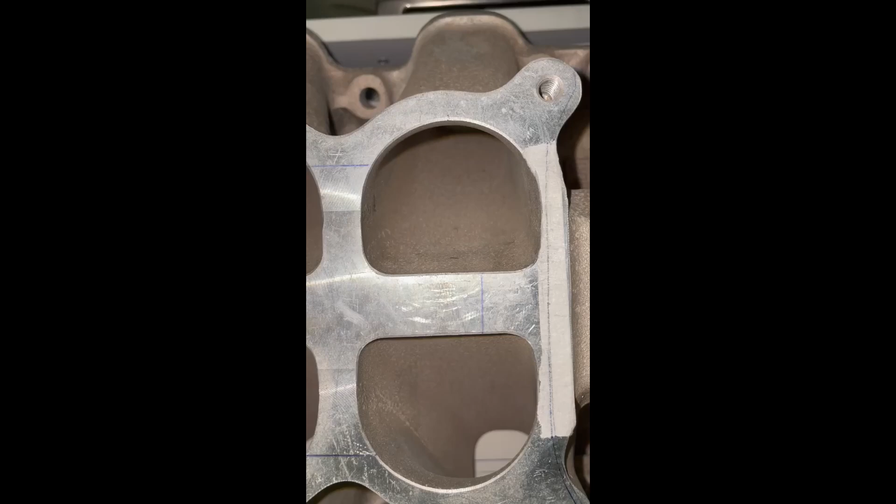Just doing the cross-sectional area of this vintage Weiand Cleveland Tunnel Ram intake. Just want to see the entry point with this D port, the actual volume that it is, compared to a little bit further down where it makes the turn, checking that volume area, and then comparing its opening further down where it mates up to the head face, the intake port on the head end. We'll just see if there's any restriction or choke points with this particular runner.

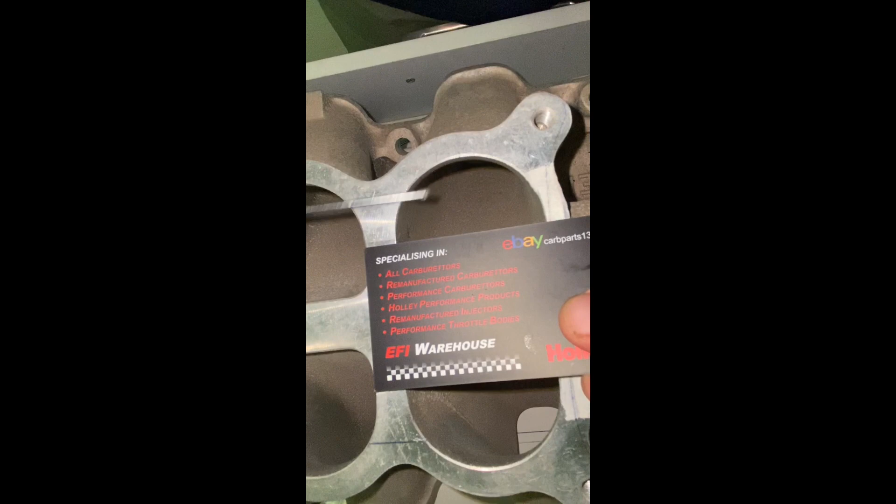So there's a few ways you can measure to get a fairly accurate volume area calculation. I've gone and done this prior to this video, so I can make this video as short as I can. Just bear with me.

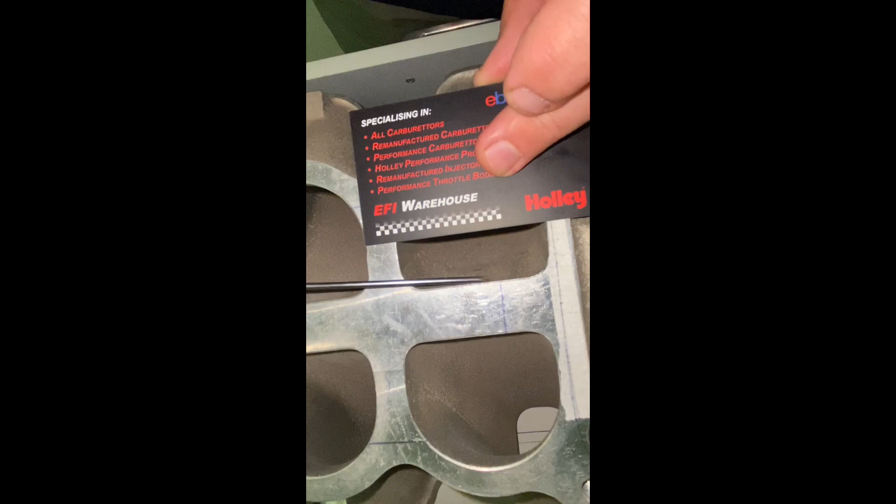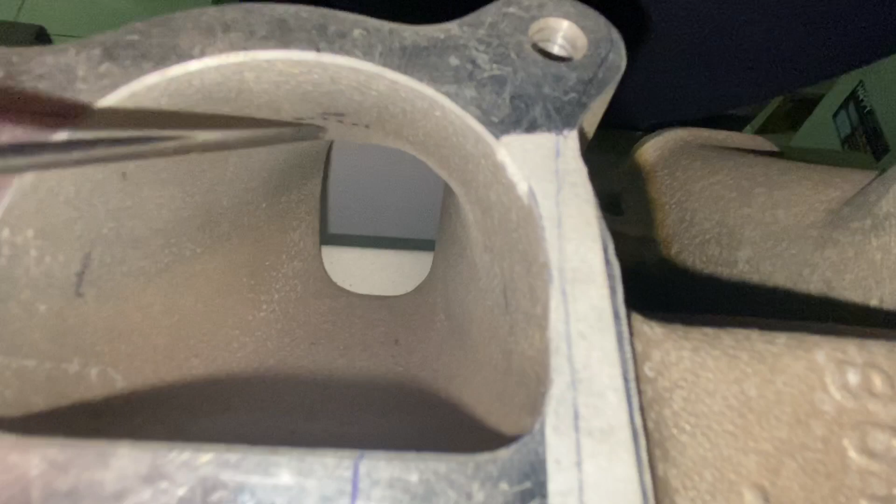You can use inside diameter calipers for all these measuring purposes. You can use all sorts of tools, or make up your own tools if you want - cardboard hard edge things, just so you can scribe your measurements and work them out on the bench. There's a few ways to get an accurate measurement with all these funny shaped D-shaped and oval squarish shapes that work their way from the start till the end.

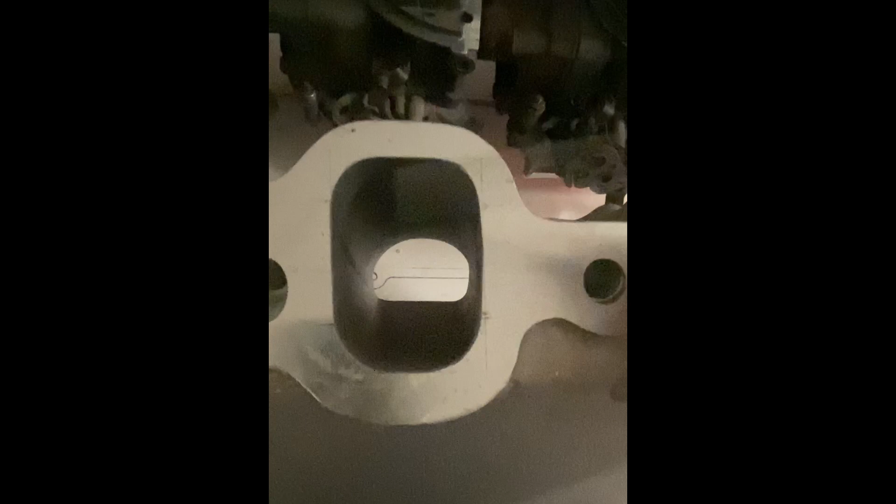To do it accurately, you need to know how to measure things. You can't just measure from there to there to there and get that calculation, when none of this is true - it's not a true rectangle or a square.

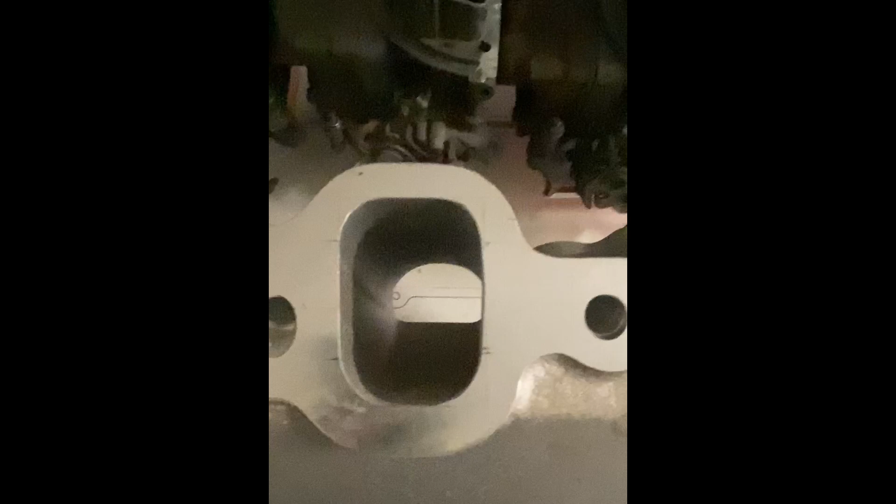So what I'm going to do here is look at that semicircle. I've already done this before, so I'll give you the quick rundown. I've grabbed the measurement of that half circle - let's just say there's a certain point where I've marked where it finishes. There's a formula to work out what that half circle is, which I've already done, and I'll share that with you guys after. Then I've sectioned off this section, which is like a rectangle now, and there's a formula for that too, which I've calculated.

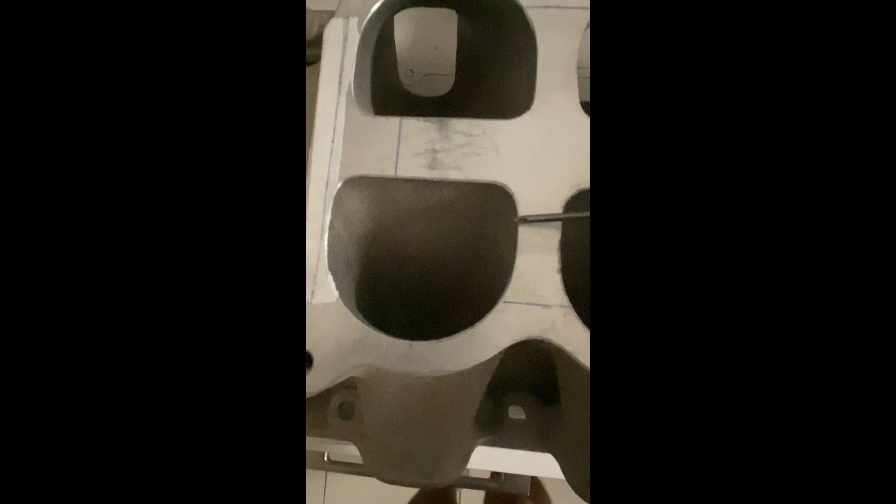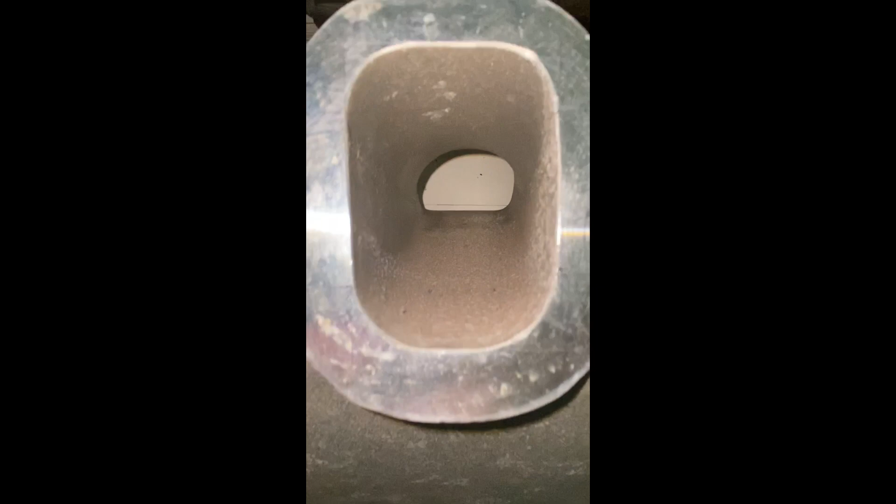So that gives me the area of the opening, and then we need to go a little bit further down, like about 3/4 of an inch down, which would be just below that turn - you've got that wall, then that radius turn, so it'll be just below that turn.

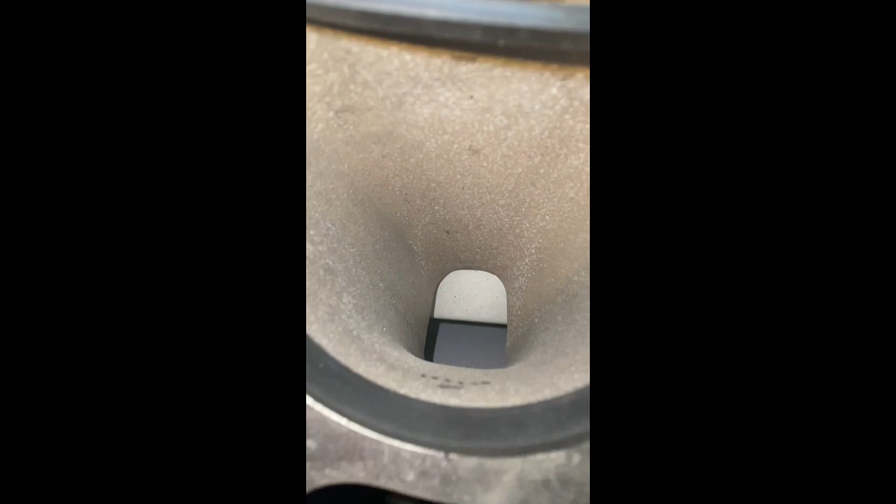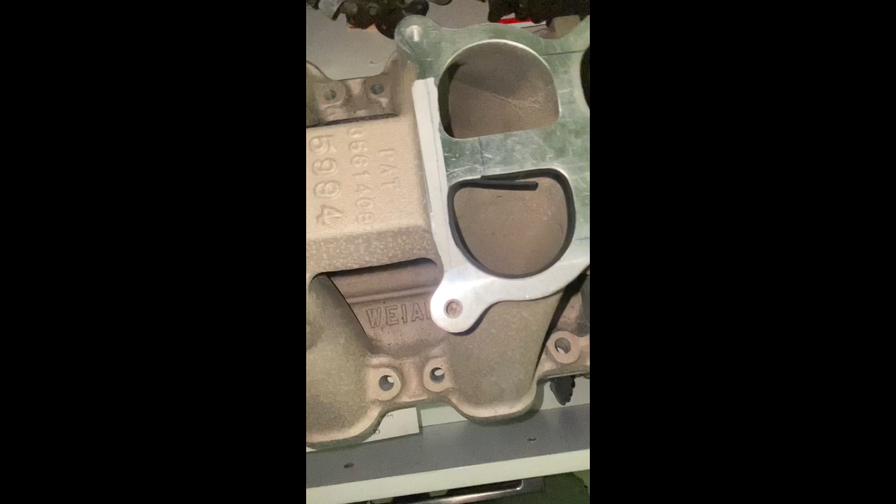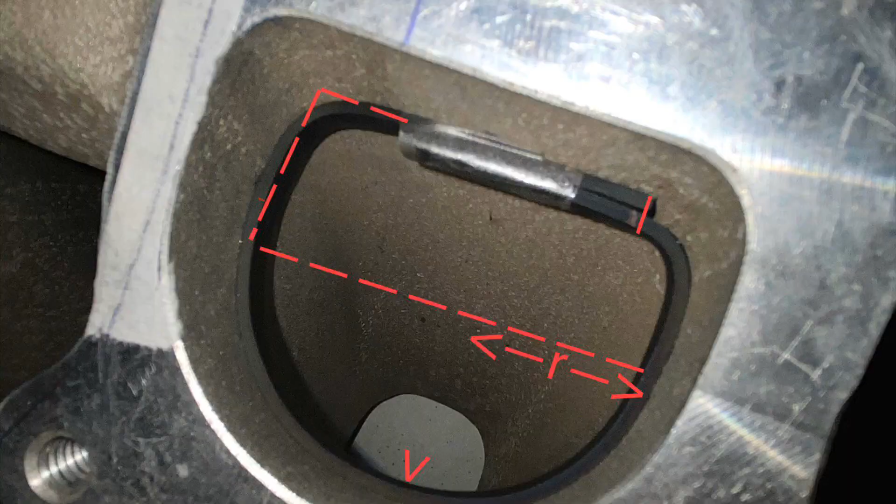And then I've done a calculation for that semicircle you guys can see there, and sectioned that off, and again done the rectangle section for that. There's a couple of different measurements I've done also, which I'll share with you guys a little bit later. I've just done what I believe, or what some people believe to be a bit of a quench point there, a tight point.

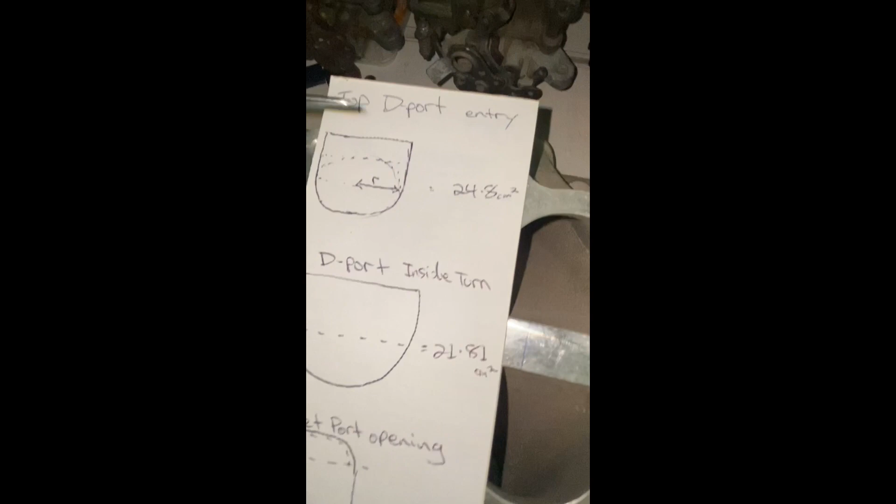So I've done the opening, I've done that turn bit right there, and I've also measured the opening of the port that bolts onto the head, and dissected that into 3 sections as well - I'll work out this radius top half.

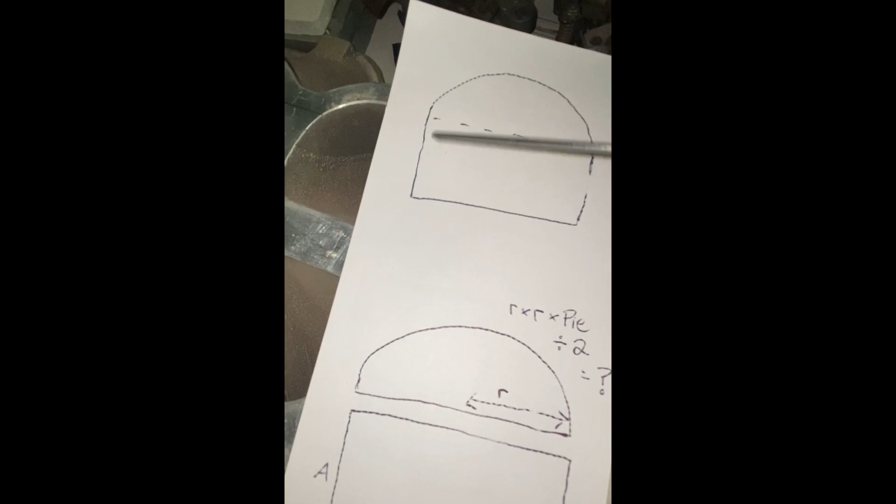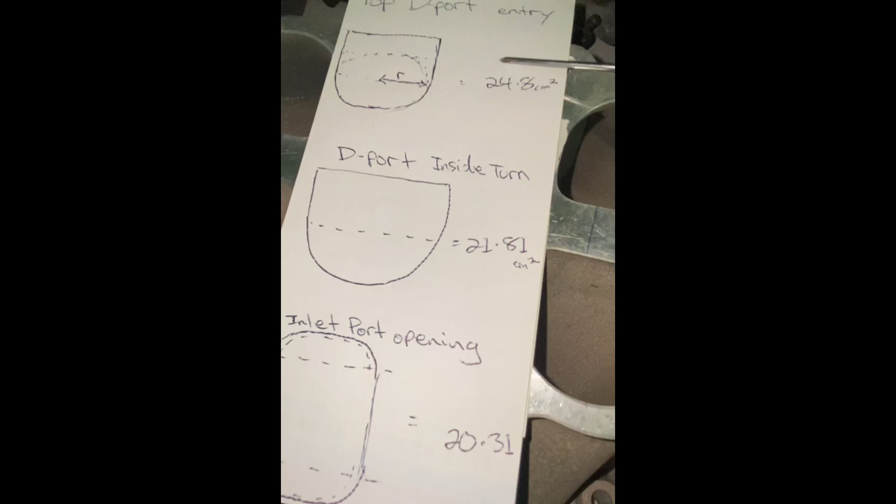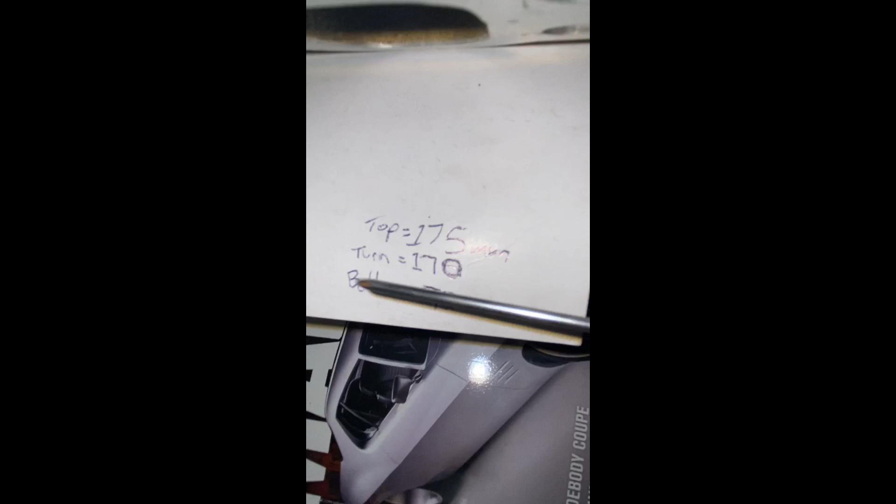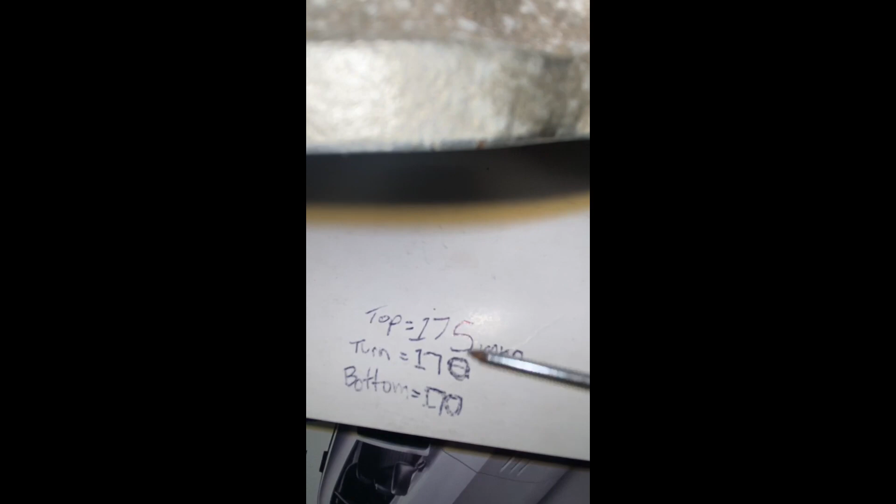So I grab myself the area of that, then I do that squarish rectangle area, and then I do the bottom, because you can't just work that out as a rectangle itself, because it's not - it's quite ovally, quite round at the top and bottom compared to the rest of it. You can't just simply base measurements square, the cross-sectional, because all these shapes are funny shapes. You've got to compensate for that corner - you can't add in that corner when that corner's not there.

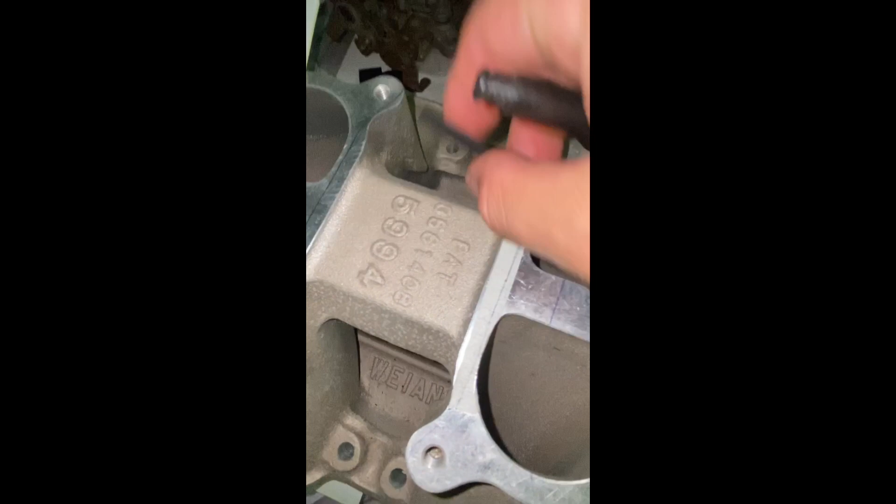So look at that - you've got to do certain formulas, which I've done, and it's not easy. It takes a while. I spent a good couple of hours measuring everything up to about 3 times.

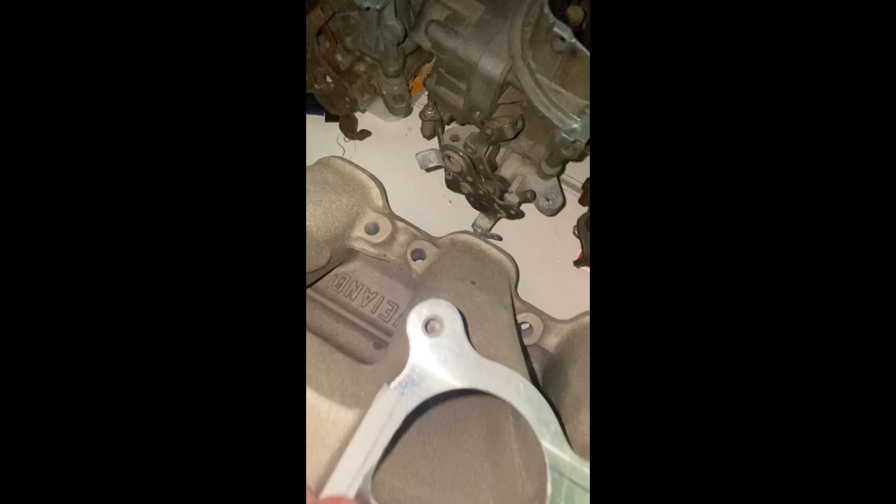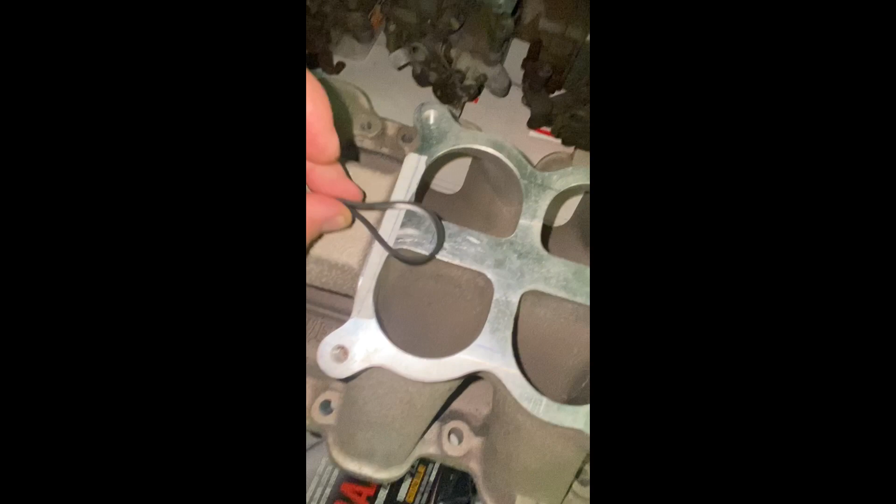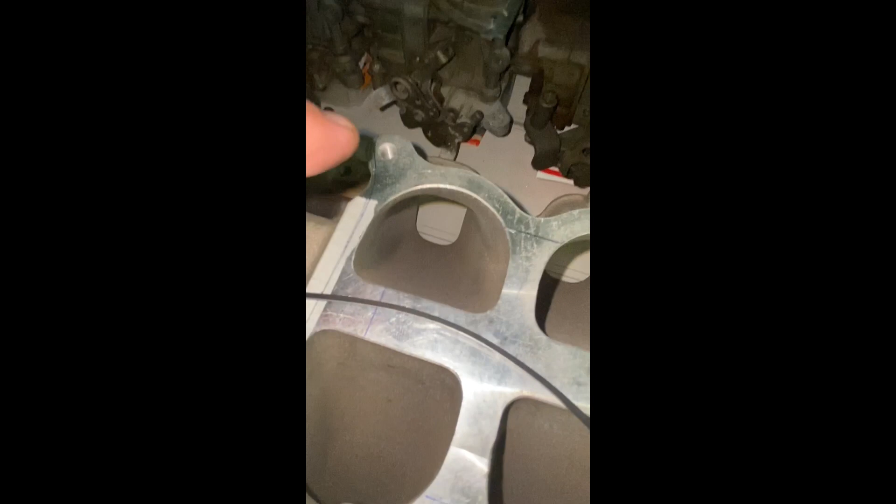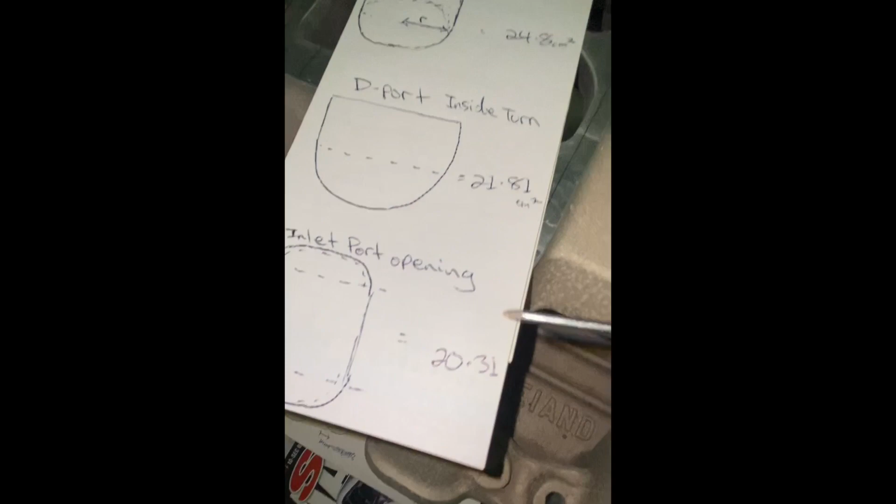It's been said before by others that there's some restriction point here compared to the actual opening down there. But you got to remember, these are different shapes. To begin with, you've got a large floor pad.